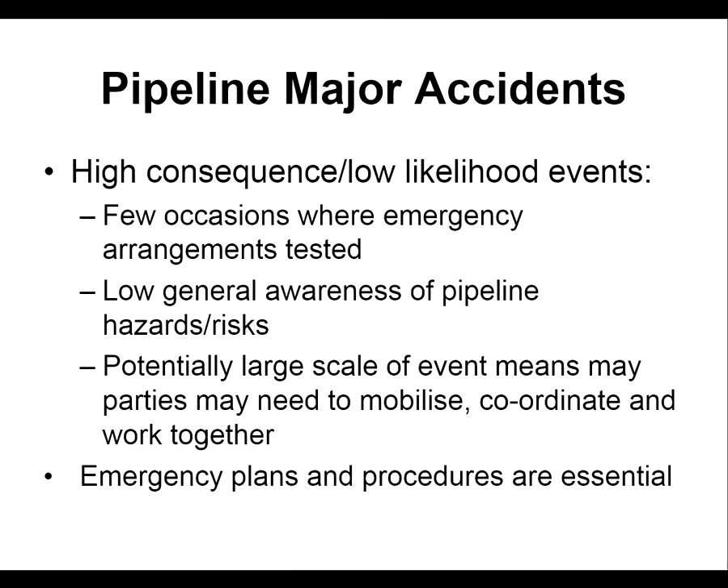The whole purpose of plans and procedures is that they're there, people understand them, they're trained to use them, and once they're activated, you don't need to worry about managing people in detail. People should just go out and do things they're trained to do without a lot of detailed management. So that's why they're important.

The typical issues associated with emergency operations: first, there's a delay in establishing the cause of an incident. This will often be because incidents are reported back through the emergency services or the pipeline operator's emergency number, probably by people who aren't used to reporting emergency incidents. They won't use standard terminology, and whoever's on the receiving end will have to make a judgment as to what's going on.

Local emergency services are often unaware of the pipeline or the consequences of failure. Well, that's a bit unfair to say that applies across the board, because if you're in a location with a lot of major hazard infrastructure, the local emergency services are normally very informed about what to do and what's there. If you're in a more remote rural area where perhaps the main activities are agriculture, the emergency services may not be so informed. So it depends. In the UK, areas like Teesside, Grangemouth, Stanlow in the northwest, and parts of the southeast where there's a lot of oil operator activity, the emergency services will be very informed and able to deal with things quickly. In other areas, that might not be the case.

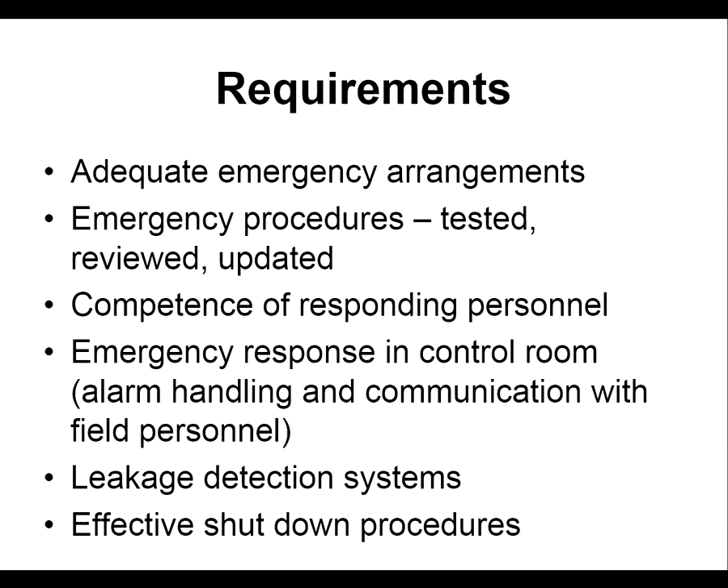And then obviously you need effective shutdown procedures. Now, emergency incidents: what you find is that in all of the major hazard industries, they will define levels of emergency. These definitions are important because they trigger certain actions, and those actions have got to be included in the emergency procedure - people shouldn't need to be told what to do. If somebody triggers emergency level 1, whoever's on standby to deal with it should know exactly what to do, and shouldn't have to be calling people asking what to do next. So the emergency incident definitions are very important because they trigger a series of reactions which need to be carried out quickly, effectively and accurately.

So let's look at what we're talking about here - Level 1, again, definitions of emergency incidents. The standard approach is that the lower the number, or the lower the letter - you might have procedure levels A, B, C, or you might have 1, 2, 3.

The higher the number, or the higher the letter through the alphabet, the more serious the incident is that you're dealing with. And the reason for that is once you've defined a level, and then you become aware that something else might happen and you have to introduce another definition, what you don't want to be doing is keep reorganizing your list of definitions, or everybody will get confused.

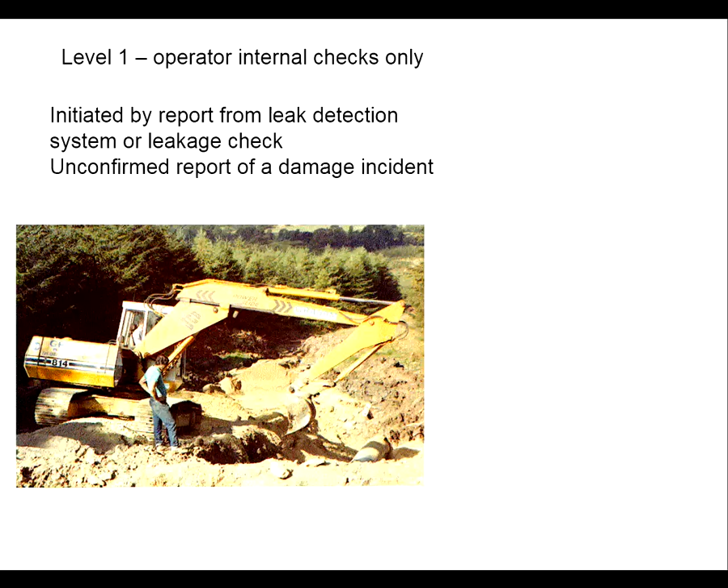So from a pipeline operator's point of view, level 1 is the lowest level of emergency, and what that really means is you've had some report either from the leakage detection system, or you've had an unconfirmed report of some sort of damage incident. Unconfirmed means that the operator hasn't confirmed that something's happened. So somebody thinks they've hit a pipeline and they've put in an emergency response. So that would be an example of the first one.

Level 2 would normally involve the operator and the emergency services, and a typical example could be a fire which has occurred on a site, on a secure site. So if it's on a secure site, it's not affecting the public. If it's a fire, somebody could well have reported it, so it is likely to involve the emergency services.

Level 3 would be a confirmed incident involving the emergency services and the operator, but no risk to the general public. Now, some of these incidents can actually be quite serious. Level 3 would normally mean that the emergency services have been notified first. Okay.

And these are the photographs. They're very poor photographs because this is an emergency that happened in this area over 20 years ago, and these are just screenshots from the media coverage. So that's why the photographs aren't very good. But I'm sure most of you will be aware of the Western Bypass that goes around the west side of Newcastle. Now, the site's actually been decommissioned, but close to the site there used to be a large array of underground high-pressure storage pipes.

And what happened was, as the road passing the storage site, you can see on the top one, there was an accident, essentially right at the edge of the site, where a lorry came off the bypass and went down the embankment. And of course Sod's Law was always operating, so the lorry actually landed on the rail track which skirted the storage site. So it looked like a very serious incident, and because it happened close to the underground pipe storage, the operator was called in by the emergency services.

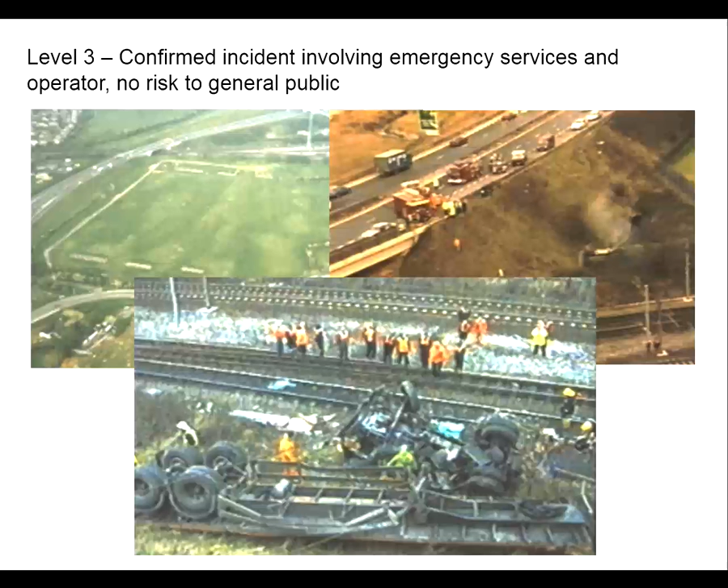Level 4 is where you've got a confirmed incident where there is likely to be risk to the general public. So you've got full mobilisation of the emergency services and the operator, and the emergency plan is initiated. Now, there have been others, but one particular incident that I was aware of as it unfolded was associated with one of the incidents we looked at in the safety lecture.

This is the failure of a large gas pipeline close to the M74, which runs up into Scotland on the west side. The pipeline is very close to the road, and this really is just showing you, if you have an accident very close to a road, you've got a hazard range associated with that. And because the pipeline's close to the road, that scenario had been notified to the local authorities.

So the actual emergency was called in by a member of the public. It happened quite late at night, and it was actually called in by a lorry driver who was passing on the road. That was called in to the police, and the police then activated the emergency plan, and it was quite serious at the time. They closed the road, they closed the railway line, and they closed Glasgow Airport.

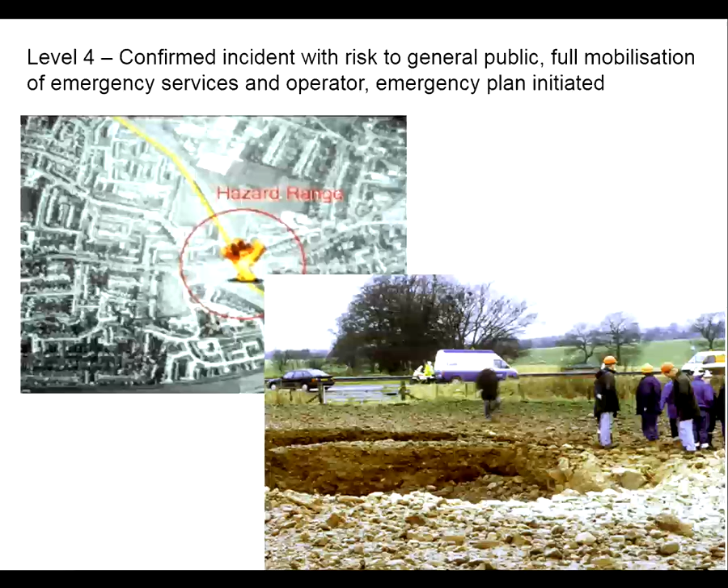Right, so if you think about the knock-on effects of doing all of that, the costs that came back to the operator: it was your asset, you caused the hazard, this is what it cost to deal with it. Those costs were quite high, so these things need to be dealt with as quickly and as efficiently as you can.

Now, this particular incident we covered in the safety lecture. I'm not going to go through it in detail again. This is the Ghislenghien incident, which was a major accident which occurred on, it was actually a construction site, but there were operating pipelines going through the site. There was a huge fire.

And I mentioned to you at the time there was a large number of fatalities. This is just an indication of the emergency vehicles trying to get onto site. So it was a major notification, so just about every emergency vehicle in the area was trying to attend. That generated quite a lot of chaos at the site, and there you can see the queue of ambulances waiting to get on the site to pick up fatalities and injuries.

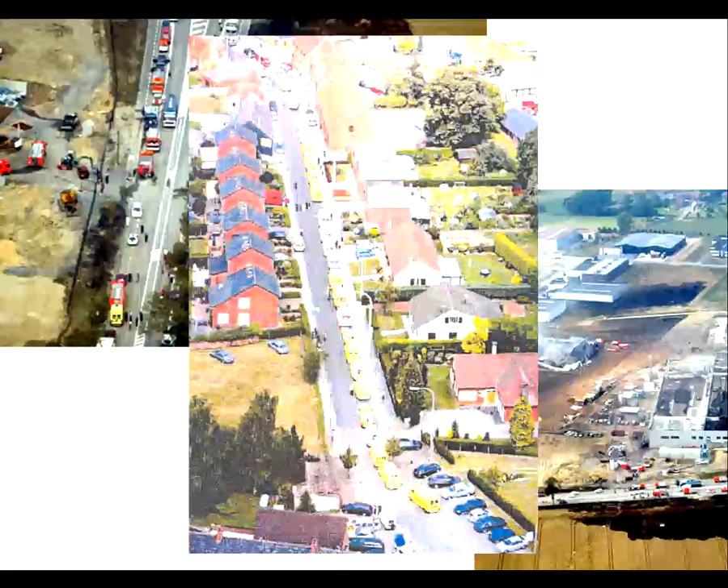So organising response to issues like this is non-trivial, and of course the issue is, once you're in the middle of it, you want to organise it and you want to do it properly, but when it's just a theoretical event, you think, well, do you really need to do all of that? So

let's think about how you start dealing and planning with it. Well, the first thing you've got to do is look at what sort of scenarios you might be dealing with, and in particular what types of emergency you may have to deal with and therefore have procedures for.

The emergency plan is obviously a legal requirement, and in the UK it's the responsibility of the local authorities. Generally, in other parts of the world, it would be the responsibility of the local government organisation, whoever's got that responsibility. And basically, it's got two arms to it. One is the emergency response, which is always provided by the emergency responders. So that is always provided by the local government organisation.

And then it's got the operator, and you can see that the operator procedures are going to be essential to what happens, the main one being shutdown, isolation, and then following that, repair and recommission. These two groups of people or two organisations don't work together very closely, and suddenly you've got a situation where they're forced to work together closely.

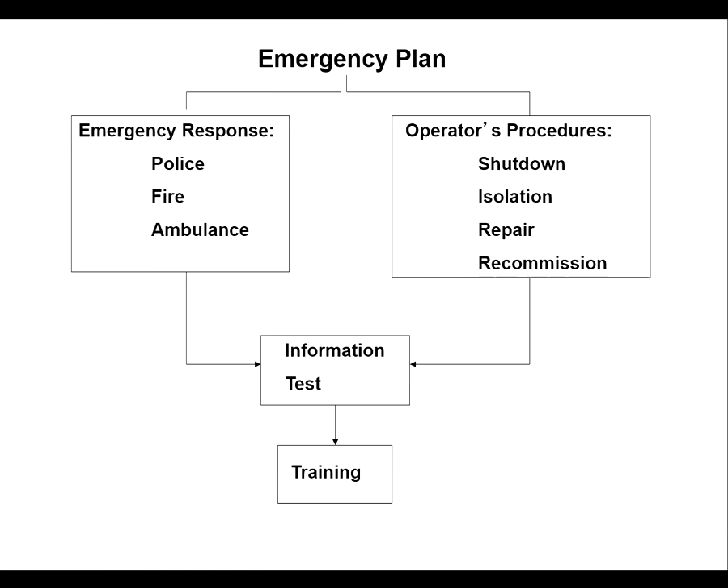So you've got to plan for that, and the way it's planned is you exchange information and you have to run tests. If you're going to run tests, people need to know what to do, so you've got to have training. And what you actually find in this sort of situation is the link between information and testing and training is quite close, because testing gives an opportunity to train. Okay?

Right, the emergency plan. It's got to be clear and easy to understand. It's got to be flexible, because you don't know where you're going to have to activate the plan. It's got to consider the safety of the public, the responders, and it's also got to look at environment and economic aspects. It's got to very quickly allocate roles and responsibilities, and in particular the allocation of roles and responsibilities is probably most important between the emergency responders.

So for example, in the event of a major accident, you would normally expect the fire service to take immediate control, and the other emergency responders have to basically report to the fire service. However, once the incident is under control, the police take responsibility, because it's their responsibility to get everything back to normal, because while you've got an accident going on, everything's disrupted and there's all sorts of knock-on effects.

So you've got an obvious tension, you can see, in that the fire service are wanting to make sure everything's controlled and safe, whereas the police are saying we want to reopen all the roads, we want to make everything accessible again.

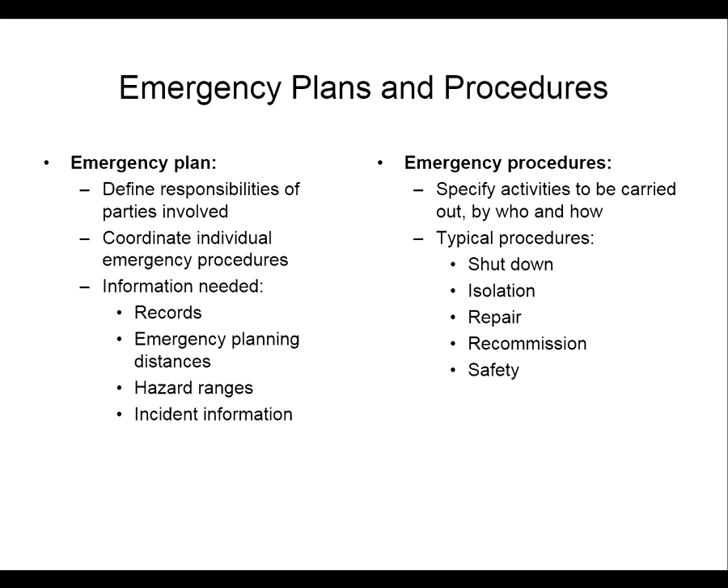The other thing that emergency plans need to do is identify and use existing procedures, right? So the emergency responders will all have their own internal procedures about what they do in the event of an emergency, and what you can't do is change those procedures. Does that seem obvious to everyone? Because it's very important. If you're expecting people to respond quickly and essentially automatically, you can't then suddenly change what they're expected to do. So the last thing you can do is have an emergency plan which could cut across the emergency responders' procedures, or not take account of the pipeline operator's procedures, because all you'll end up with in that situation is chaos.

So the emergency plan will eventually focus on the emergency response and basically say, well, in the event of an emergency, this is what everybody's got to do. So if you just have a quick scan of that list, you can see where the interface with the operator is going to be very important here. The operator needs to inform of the failure modes and consequences. It's the operator's duty to determine the hazard distances that might be associated with a release.

In reality, it's the operator's duty to do this, but you often find that's the first source of conflict between the operator and the emergency responders. The emergency responders like to take responsibility for this because essentially they are the ones who will take decisions about evacuation and shelter of people. But the operator is probably in the best position to be able to do that. Then there are potential problem areas, obviously geographical areas where you could have a problem, in particular a problem of access.

The identifying the nature and extent of resources that may be needed in the event of an accident. Actually, just on this one, geographic areas: you might think a geographic area is going to be a problem if you can't actually get emergency equipment to the area.

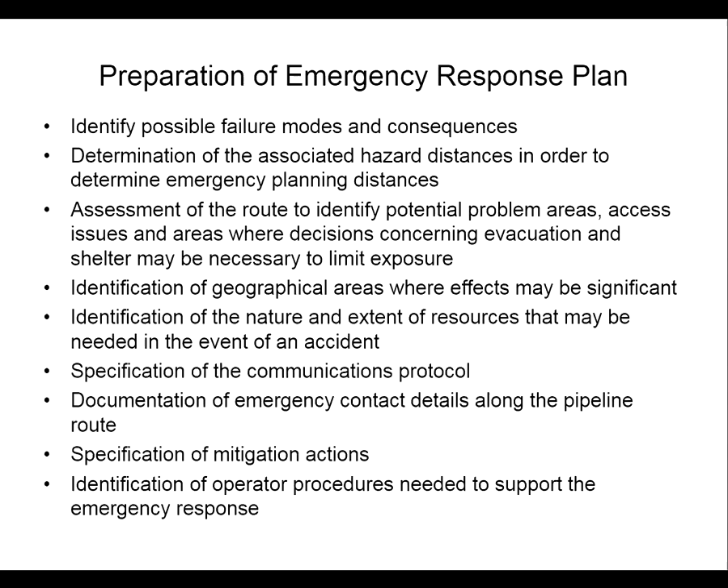Okay, so the information you need to prepare the plan is actually quite straightforward, and we've covered a lot of this. Well, we haven't covered details of planning distances, but we've talked about hazard ranges, and we've talked about the types of hazard associated with different types of product.

Right, now the communication system has got to be simple and brief. The problem with communications systems being brief is that people develop lots of acronyms so that they can say things quickly over mobile phones or radio systems, and what that means is there's very few people who actually understand what they're saying, so that is a problem. Recording of information is very important.

Modern emergency communication systems rely heavily on mobile telephones, and at one time, I'm not sure what the position is now, that meant that in the event of an emergency, the local mobile phone network would be immediately taken over so that it was available for use in the emergency. And of course that happened in the Buncefield incident, which happened in the UK, I think in 2005. The local mobile phone network was taken over so that there was clear communications between all of the parties. And what that meant was that a lot of the local people couldn't use their mobile phones because they were inactive. So there's all sorts of issues. But the main communication requirements are receipt of emergency calls, notifications, and responsibility for liaison.

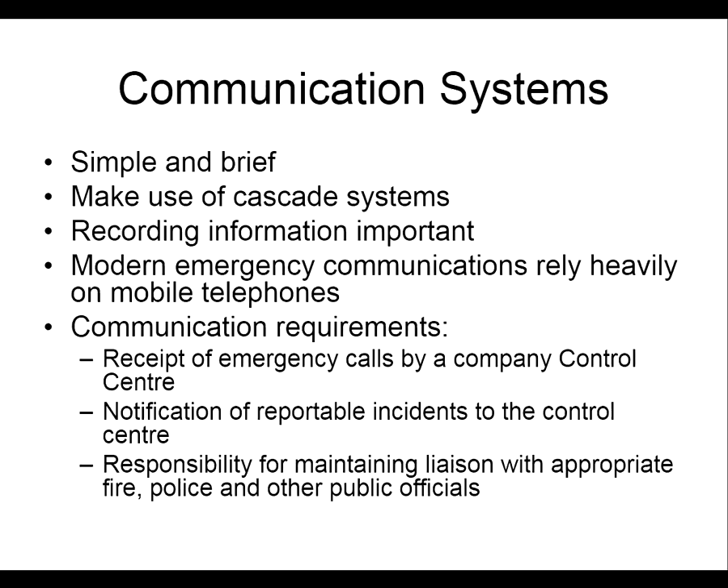Right, in terms of the emergency plan, you've got to look at worst case scenarios, and this doesn't necessarily mean thinking about the absolute worst disaster that could happen. But if a bad situation occurs and you're not prepared to deal with it, then that is a serious flaw. So, for example, if you look at worst case scenarios for pipelines conveying flammable fluids, the worst case that you would probably have to deal with would be an unconfined vapor cloud, which would lead to an explosion followed by a major fire.

So if you think that's the worst case, you've then got to look at the extent and size of the cloud, the dispersion concentrations, the overpressure which could occur in the event of the explosion, since the explosion would happen in the event of ignition, and then the safe distances for people.

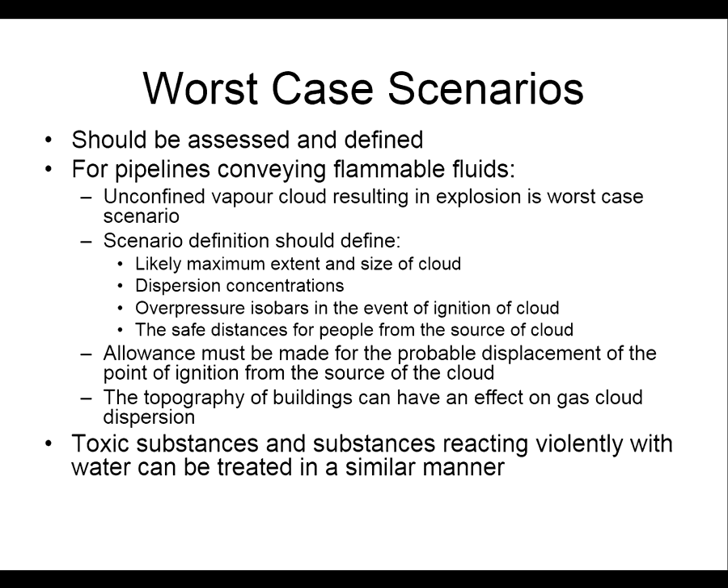And of course the big issue you're dealing with in this worst case scenario is that the source of ignition is unlikely to be at the point of incident. So dealing with that is a problem, and that brings you into topography of buildings and the effect that has on gas dispersion. Toxic substances, of course, probably provide the absolute worst case scenario.

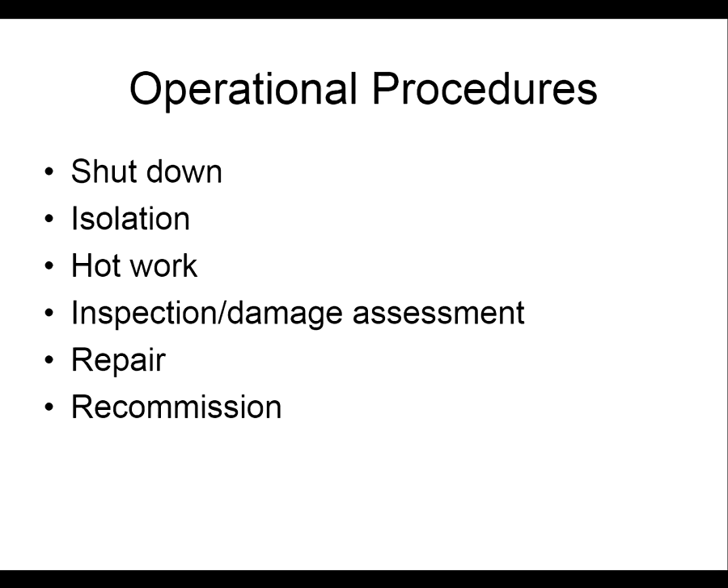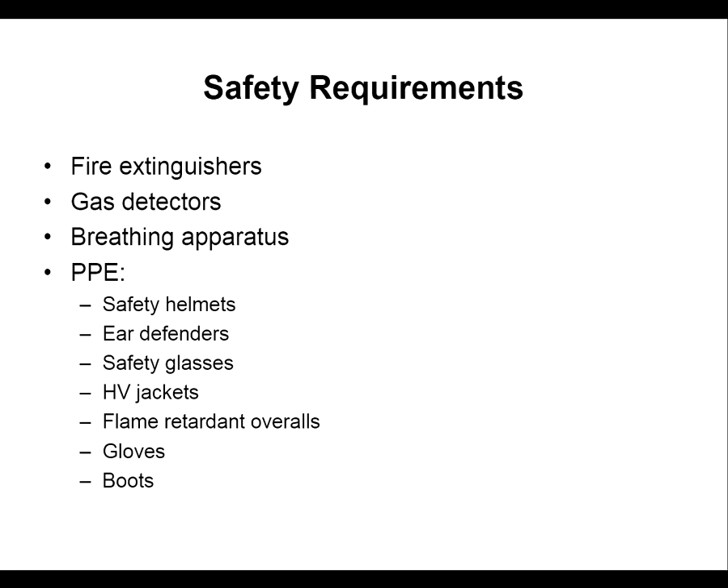Safety requirements predominantly deal with the hazard and protecting the people who are dealing with it. One important aspect of emergency procedures is the management of damaged pipelines. If you've had a report that a pipeline is damaged but isn't leaking, the issue is: it might not have failed now, but could it fail in the immediate future, particularly when people are working on it? So what's absolutely essential as part of this is procedures for management of damaged pipelines.

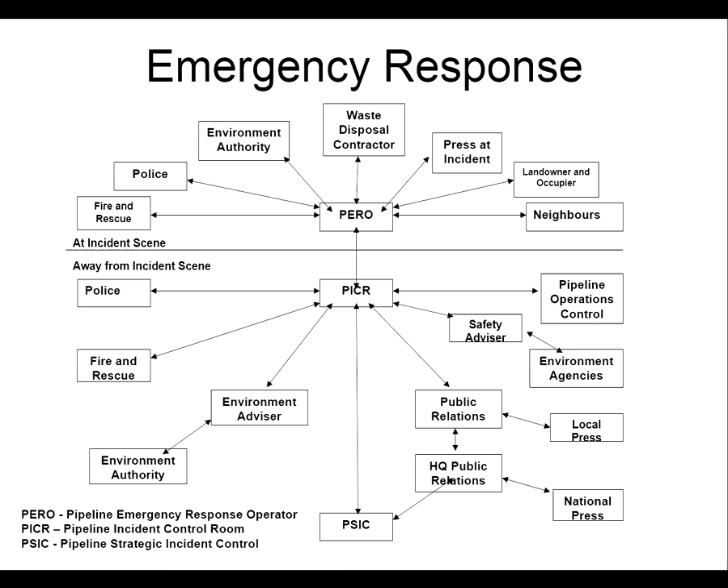Procedure for operators. Yeah, absolutely right - that's why this isn't a good slide, because it's basically saying, well, in the event of an emergency call coming into the operator's control room, what does the controller do? You're absolutely right, and therefore in that respect it's only a very limited aspect, and in reality the situation looks more like this - much more complex, much more confusing, and much more difficult to control.

So that takes us back to testing, reviewing and updating. There's a number of things you've got to take into account here: first of all, the fact that the local infrastructure is going to be changing, changes in response technology, and lessons learned from previous incidents. That's actually quite difficult to do - people don't do that terribly well.

Lessons learned from the application of plans during accidents - well, if we think about it, we talked a lot about the Buncefield incident and the Ghislenghien incident. There are still papers being produced about what was learned from those incidents, so it does take a long time.

A big problem is changes in personnel, particularly now, because you find that people don't often stay in one position for too long. So training is important, because these events don't happen very often, and when they do happen, you expect people to deal with them.

So you've got to train them, and that means you've got to basically expose them to real events. For example, in the UK, the organisation that does a lot of that is the Fire Services College, where they actually run what amount to real life incidents. People have got to be aware of incident terminology - in particular, the obvious incident terminology they've got to be aware of is the definition of the level of incident.

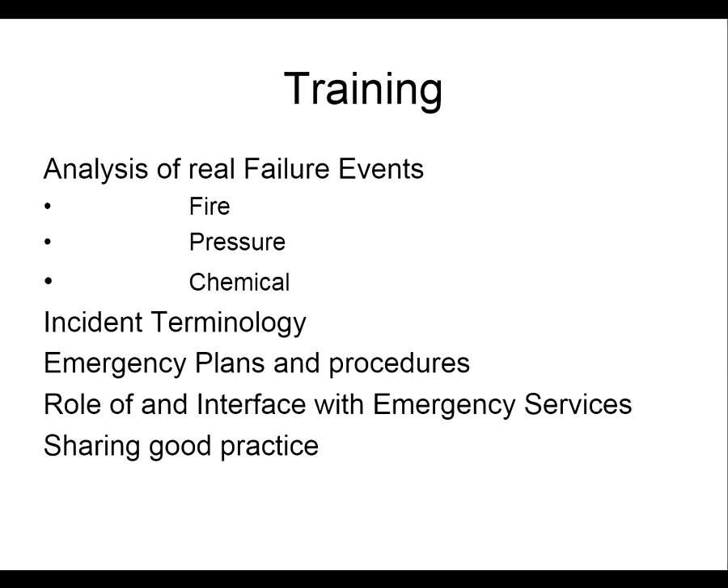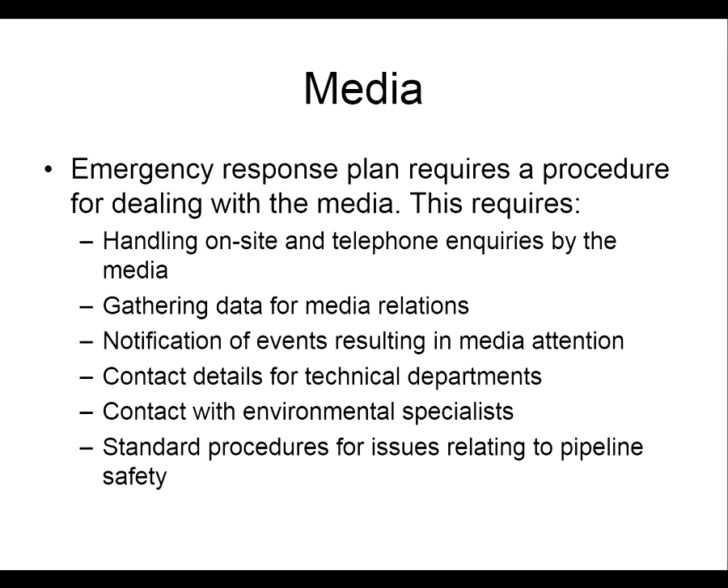Obviously the bottom line is sharing of good practice. Now, media - any emergency response plan is going to require a procedure for dealing with the media, and there are a number of issues you need to address. If you don't control the interface with them, they will take control of how they're informing people. But you've got to deal with them because the media will be the fastest route of informing the public. If you use the media properly, you can deal with the initial aspects of the emergency very quickly and effectively, which means you've got to manage them so they don't issue things that could frighten people, because when people are frightened they won't behave in a controlled way. But you can get information to a large area and a large number of people very quickly.

These are the number of considerations you need to take into account when developing emergency plans and procedures. This is a typical tutorial question, which shows how I expect you to deal with this information in terms of an exam. You should be able to explain why emergency level definitions are needed - the examples are fairly straightforward - and explain the purpose and objectives of the emergency plan and emergency procedures: what information is needed, what activities are involved, interface with the media, the purpose of regular training, and why a procedure for management of damaged pipelines is required and what it covers. The most important bullets there are the first two.

We'll be coming on to that again when we go through the overview and summary. Question: do codes and standards give guidelines on emergency operations?

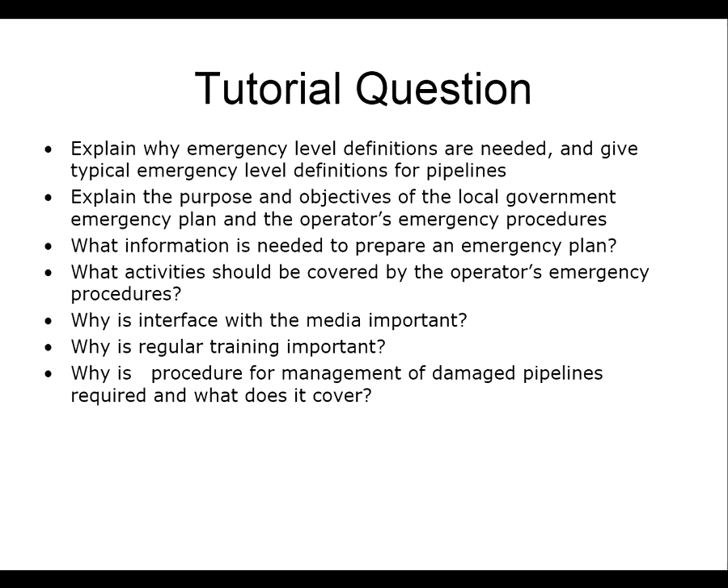Right, I just need to decide what to do now. At the beginning of the lecture, what I said was, in terms of this session...

There's 3 things I want to do. The first one was to go through that lecture. Second is to go through an overview of the lectures I've given you, and then I have a summary lecture which goes through the overview and points out the important bits in the notes I've given you. I'll only do that if you want it, it's not necessary. And then the final thing is to return to the assignment.

Now the session on the assignment is down to you really. I would like to be able to offer you any help that I can. If you've started on the assignment and feel you want to just get on with it the way you're dealing with it, then please don't feel you need to stay for that session. I'm going to go through some high-level points which, if you haven't started the assignment, are a quick kickstart to it.

And because the assignment is based on a real project that happened, I have brought some material prepared by the operator that was presented to the technical community and the safety regulator at the start of the project. A lot of it's not relevant to what you're doing, but some of it shows you the kind of issues the operator identified that they needed to think about. Okay.

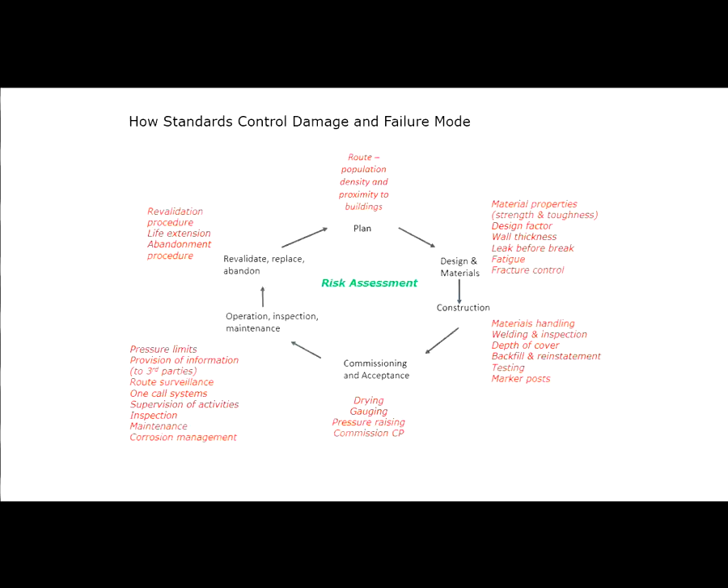Then I gave you a couple of slides which basically said all of the pipeline standards aim to minimize failure and mitigate consequences. So those are the aims—so how do they do that?

In terms of minimizing the frequency, they try to avoid material and construction defects, and they do that by requiring technical specifications, and in particular the pressure test—the pre-commissioning pressure test.

They control degradation, in particular through the design and installation of corrosion protection systems. They ensure pipe resistance to the majority of likely impact damage through wall thickness and any required protection measures. And they control the operating stress of the pipeline by controlling the design factor.

Okay? Sorry, how many questions are you going to ask in the exam? Well, I contribute half of a safety question, and then I do two full questions on the exam, which is set at the end of this module.

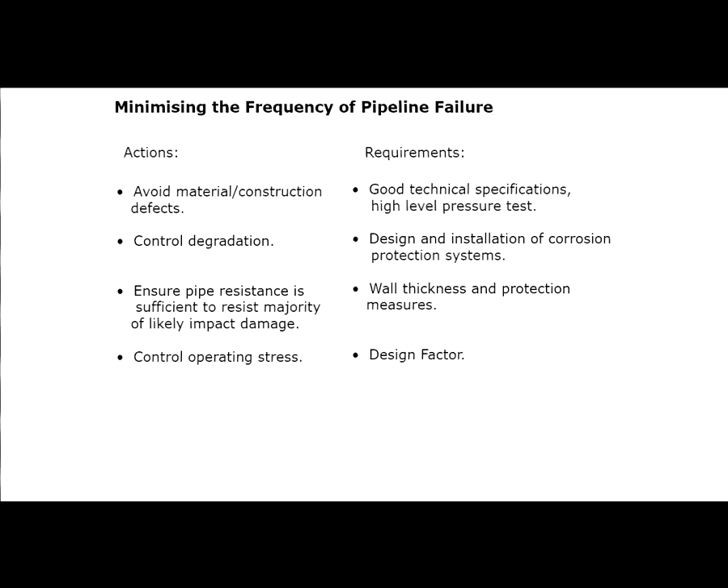Right, minimizing the consequences of failure. The codes do that by the selection of the location of the pipeline, and generally that's how the code classifies the location and how it deals with the population and infrastructure around. So in the UK codes, they will classify the location as class 1, class 2, or rural and suburban, and then the ASME code basically starts from class 1 through to class 4.

Routing: having identified and classified the area, the codes then basically provide guidance in routing through areas of minimum population and infrastructure, and in doing that they specify the distance from the population and infrastructure, and the intention there is to minimise the development, and therefore numbers of people in the vicinity of the pipeline.

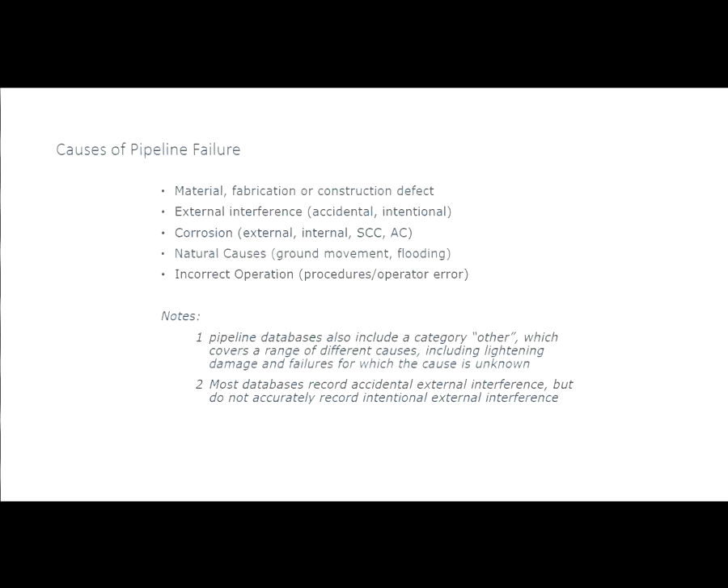Causes of pipeline failure, fairly standard causes. These are the typical causes which are listed in all of the failure databases. The key ones are material fabrication, construction defects, external interference, corrosion, natural causes, or incorrect operation. And then there is always a category other, which is a catch-all for everything else that might happen.

And then we discussed some pipeline failure modes. The leak is a stable defect. The rupture is an unstable defect which will extend during the failure, and the extent depends on whether you've got a liquid or a gas. It's dependent on the compressibility of the fluid which is in the pipeline.

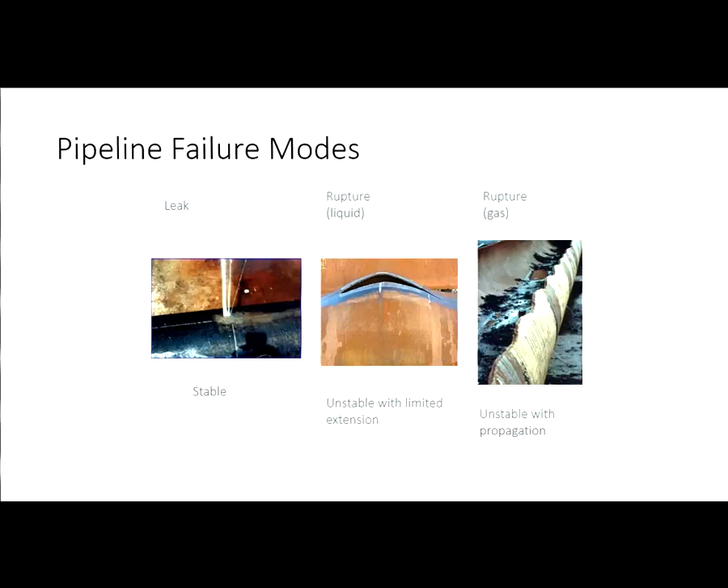Right, so coming on now to surveillance, inspection and maintenance. These were the points that I said I would like you to pay attention to. So the main purposes of surveillance are to assess population changes in the vicinity of the pipeline and to identify activities which could pose a threat to the pipeline, in particular anything to do with land management or construction, and also to identify any environmental issues which could apply loading to the pipeline, such as floods and ground movement.

Inspection. The main issue with inspection of pipelines is internal inspection and external inspection. So actual physical inspection of the pipe wall, which is inline inspection, and external inspection or condition monitoring, which is monitoring of the CP system and CIPS and DCVG surveys. Okay.

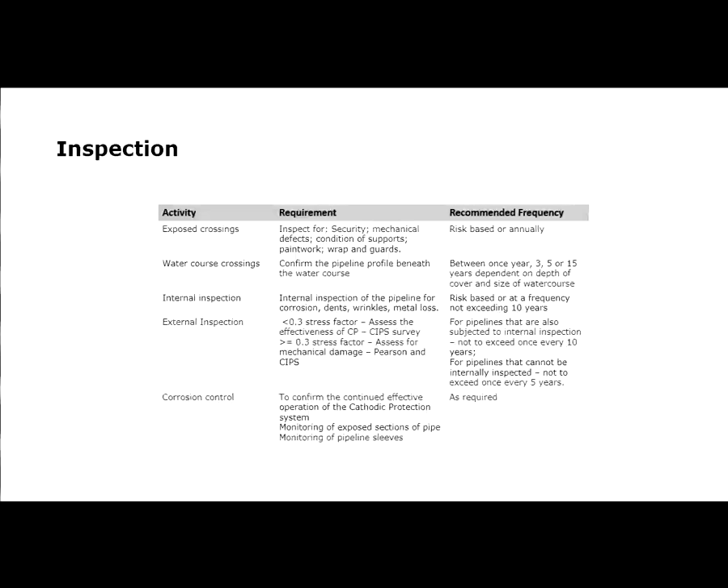Right, pipeline installation, operations and maintenance activities. Now, this aspect is essential, but it's tedious, and I have tried to simplify it and put the information in tabular form. The main issue here is on any site, you're going to have to do routine checks, functional checks, and overhauls or aspects of mechanical maintenance. So I've tried to summarise that, indicate which equipment is relevant and the frequency that you would do that. We covered the frequencies in that.

So I'm not looking for very complex and analytical assessments of reliability-based or risk-based maintenance. The bottom line is, as a pipeline operator, you're responsible for a number of installations, so what is the minimum you need to have in place to deal with them?

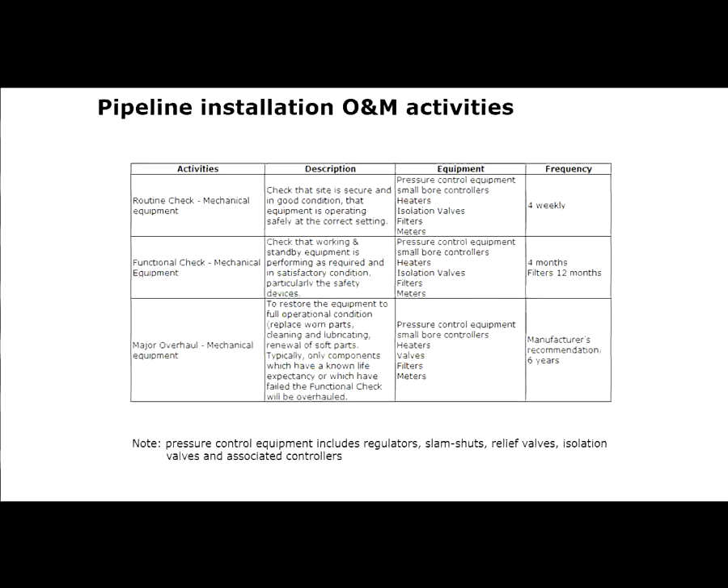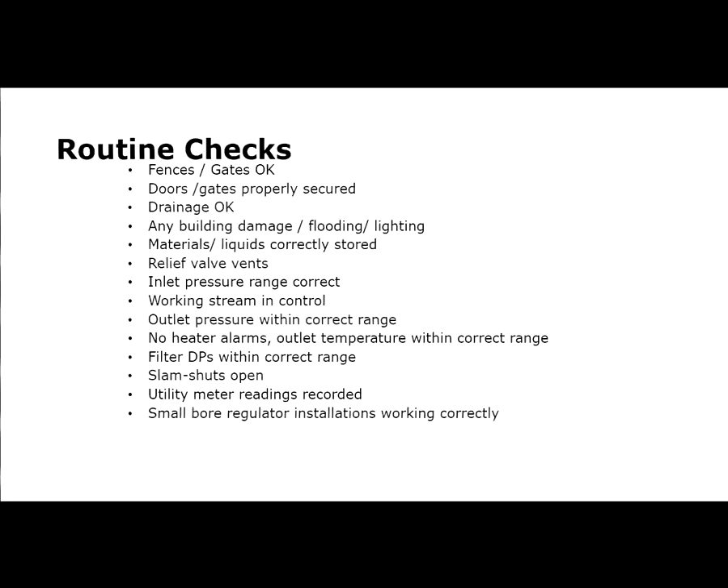Right, I'm certainly not suggesting for one minute that you need to learn these lists, but what you do need to know is, basically, what's the difference between a routine check and a functional check? So we covered the example lists of what sort of things you would do. You don't need to learn these lists, you just need to have a feel for what sort of activities you would undertake in routine checks. Similarly in functional checks, so bottom line here is, what's the difference between a routine check and a functional check?

Okay. Factors affecting maintenance frequencies. The issues here really are the site characteristics. If you have a remote site, a remote unmanned site, the tendency will be to visit the site on a minimum possible basis. And in order to do that, you need to take account of, well, what sort of telemetry have you got in place? In other words, can you monitor it remotely?

Is it critical to the performance of the system? Is it sensitive to any environmental factors? Like, for example, if you suddenly have a very low temperature, could something affect the site, and therefore, following a low temperature weather incident, should you go and check it? And bottom line, is it secure? Routine checks are generally associated with the security of the site.

Okay, so if it's in a very remote area and it's pretty secure, then you'd think, well, do you need to visit it every month, or could you extend the frequency to 2 or 3 months? And then in terms of telemetry, it's a question of how much telemetry you've got in place. There should always be a minimum level of telemetry, because you will have to operate a SCADA system on the pipeline. But for some sites you may have much more.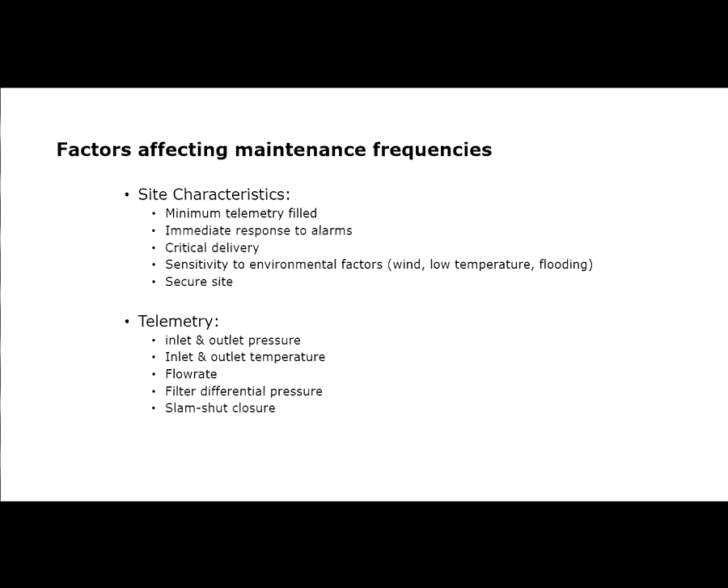Right, hot tap and stopple procedure. Obviously, Gary covered all of this last week, and all I'm going to do is take you through some slides which are on the notes which I put on Blackboard. Right, so hot tapping is drilling into an operating pipeline to get access to it, and stoppling is plugging the pipeline temporarily so that you can do something to either modify or repair it.

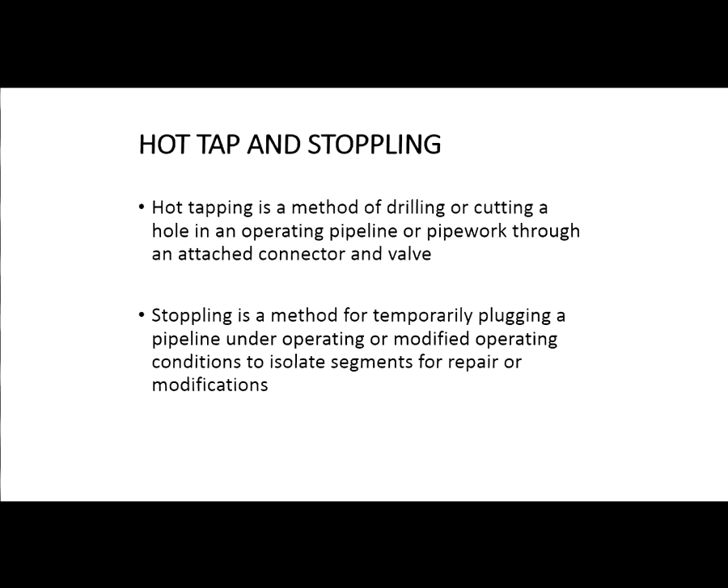So the procedure, very simply, is this list of activities. Now I need you to have a better handle on it than just this list, but the list is important because it's very easy to miss one out. So you've got to think about the preparation. The preparation is basically digging the hole, checking the pipe, etc. Installing the tees, carrying out the drilling operations, fitting the bypass, inserting the stopples, undertaking the work, recommissioning the isolated section, withdrawing the stopples, removing the bypass, and then locking off the stopple entry points.

Now, in the notes that are on Blackboard, I've been through each of those and put a fairly reasonable description of each of them. Okay, so hopefully that means that the key factors in each of the stages of the procedure are there, so that you can see why they're important.

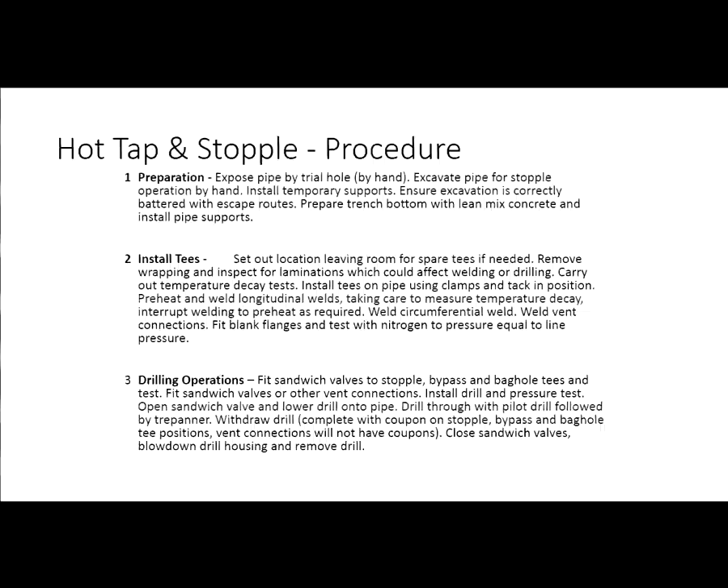Lots of engineers would prefer to use diagrams rather than lots of words, and so annotated diagrams are totally acceptable. So as long as you get all of the stages of the procedure, so you don't miss any of the key stages out, it's quite acceptable to do it as a series of diagrams.

The next ones you're going to use to insert the stopple, and in the notes that are on Blackboard, the next tee was generally used as a baghole tee. Now, the issue here is the double block and bleed requirement. Okay, so this procedure was developed primarily by the gas industry.

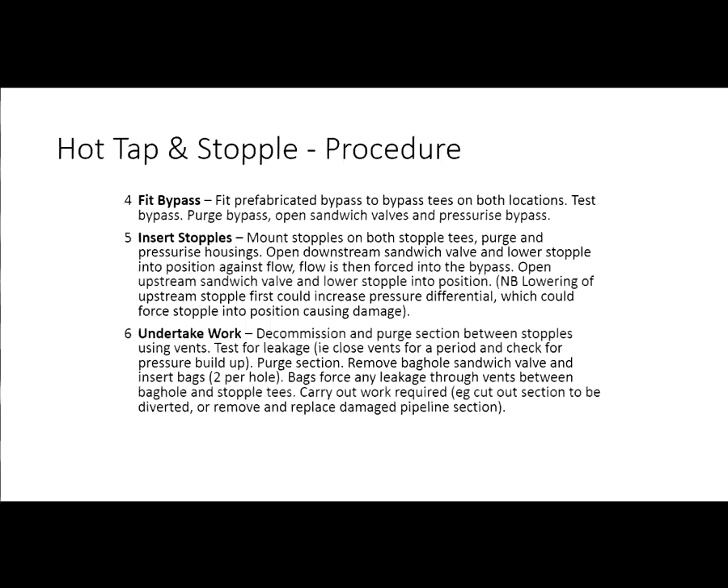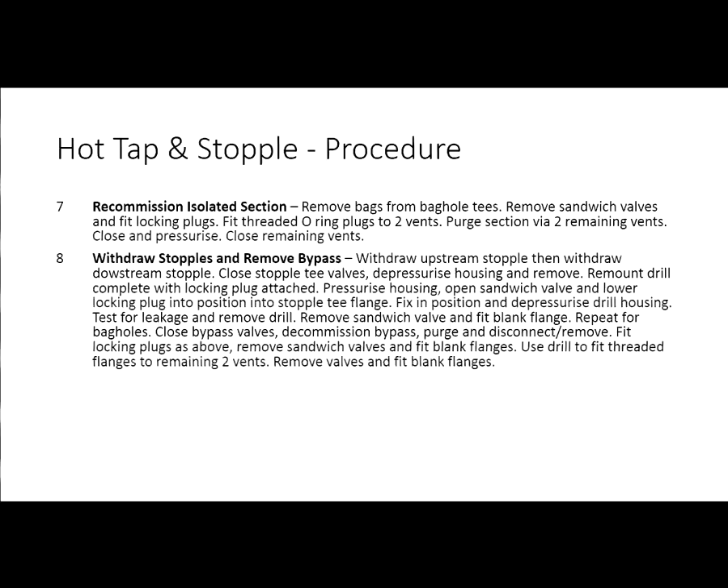And then finally, recommissioning the isolated section, which means essentially removing everything and purging and fitting the locking plugs, then withdrawing the stopples and removing the bypass. And as Gary emphasised last week, the important issue here is to remove as much as you can from the pipeline, because whatever you leave on the pipeline is then going to be part of the pipeline for its future operation and could affect the integrity of the pipeline. So the approach is always to try and remove everything that you can. And then this is a diagram which basically explains the locking flanges.

Sorry, regarding the integrity, you mean removing inside the product? No, if you think about it, before you start the operation, you've got a length of pipeline, which is just the pipeline, okay? Then you do this operation, and as a minimum, you're going to leave the tees on the pipeline, because you welded the tees onto the pipeline so that they provide you with a full pressure containment location, so you can't take them off. But whatever you can take off, you take off. So for example, you've got a tee with a bypass connected to it. You don't leave the bypass there, you take the bypass off. Okay, so whatever you can remove, you do remove.

And this is basically just showing the procedure for locking. So we've got these specific locking flanges, which Gary covered in his presentation. They've got an O-ring in them for a seal. So these locking flanges are inserted essentially using what was the stoppling arm. So they're pushed down into the T.

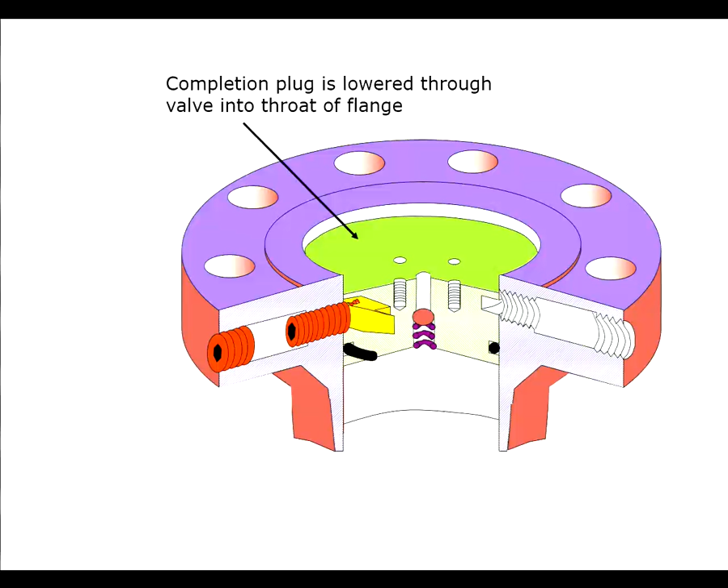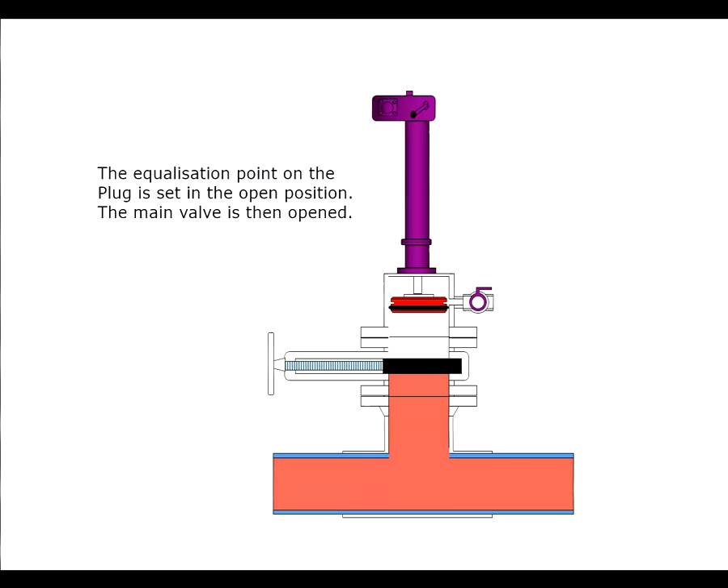Okay, and obviously there's this. What you're actually doing, you're putting this in as pressure containment, so you've got to be able to equalise the pressure over the plug while you're doing it. If you don't do that, there is a chance that the plug might not seat properly, so you could end up not having it inserted properly. Okay, so once you've got the plug in place, you then open the valve and you push the plug down into the T.

Okay, so here, this is the sandwich valve, and you can see the sandwich valve has got these flanges on it. This flange is connected to the T. So actually, it's not screwed there. It's like seal it and fix it. That exactly, yes. But it has got a groove in it, right? And you are going to have to screw connection points into this groove to hold it in place.

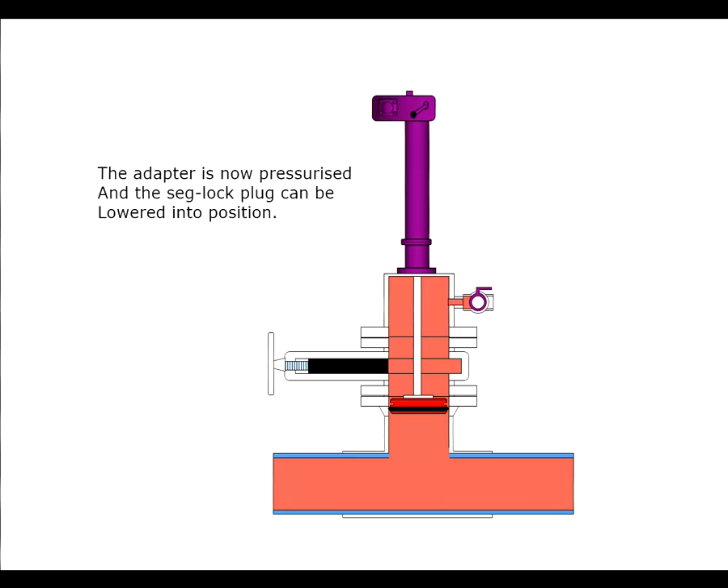So essentially this flange here, when you take the sandwich valve off, that flange needs to be replaced by a blank flange over the plug. So essentially the plug is being used for pressure containment while you disconnect all of the equipment. Okay, so once it's in position, you then drive the screws into the groove. So basically when you take all of this equipment off, you're not just relying on the O-ring to make the seal.

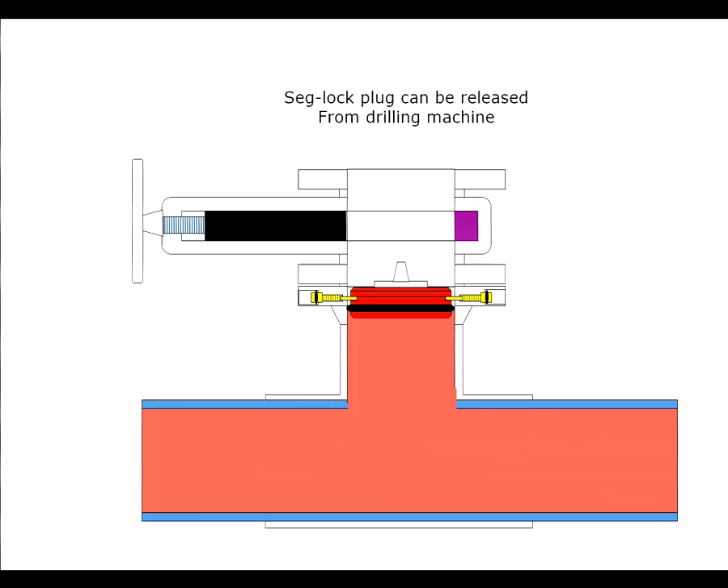Which means you can then bleed down and you can expect the plug to actually hold the pressure differential. You can then take the valve off, take the plug holder off and put the blind flange on. Are those screws part of the T? Yes, those screws are part of the T which you are plugging off.

So these hot tap T's are actually quite specialist components. And in fact, I think there's a complete ASME standard which is dedicated purely to the design of hot tap T's. Yeah, they have the dedicated hole with a seal. These two holes, they are for the screw? Yes, these here. This one. Yes. They're basically indicating that you're screwing in.

Okay, so basically, this is what I meant earlier. You've got to get to the stage where you've only left on the pipeline things that you can't really take off, and whatever you've left on the pipeline is secure. And one of the issues is that a lot of these connections do leak, and if, as a result of not installing them properly, they leak, then you've got an ongoing maintenance issue to deal with.

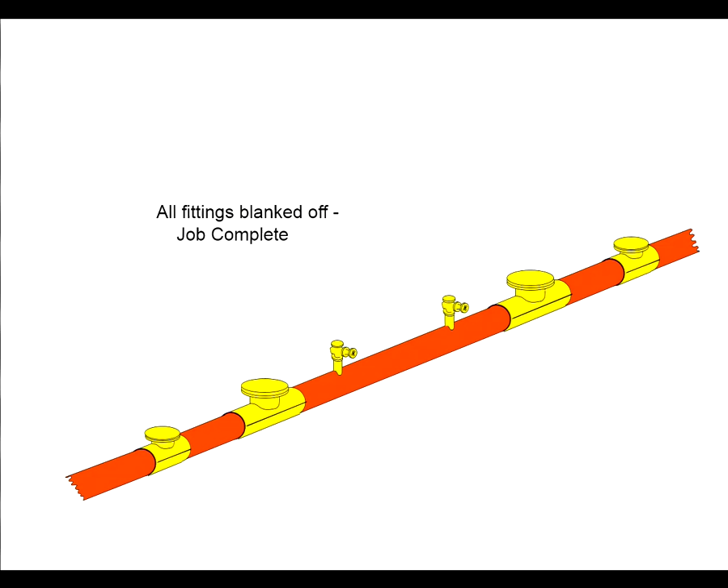So that would be the ideal scenario, right? Sorry? That would be the ideal scenario. Absolutely, yeah. Right, okay, so I'll just quickly go back to the final bit of the...

Okay, so basically the aspects of emergency operations which I would like you to concentrate on are the emergency levels and why they're needed, the purpose of the emergency plan and the purpose of the emergency procedure.

The emergency incidents are there. Why are they needed? I don't think there's a specific point on why they're needed in the slides, but I think we discussed in quite a lot of detail why you need these things. In the event of an emergency, you haven't got time to do briefings, provide instructions. You've basically just got to expect people to follow procedures and to know what they have to do. And therefore, your emergency procedure has got to immediately tell people what sort of incident they're dealing with.

Purpose of the emergency plan. Regarding this question, why you need the emergency plan, can I just write your answer? Let's say, in case of emergency, you don't have time to do briefing, that kind of thing. Absolutely, yeah, and I will get full marks. Oh, you'll get full marks of however many marks are allocated, absolutely.

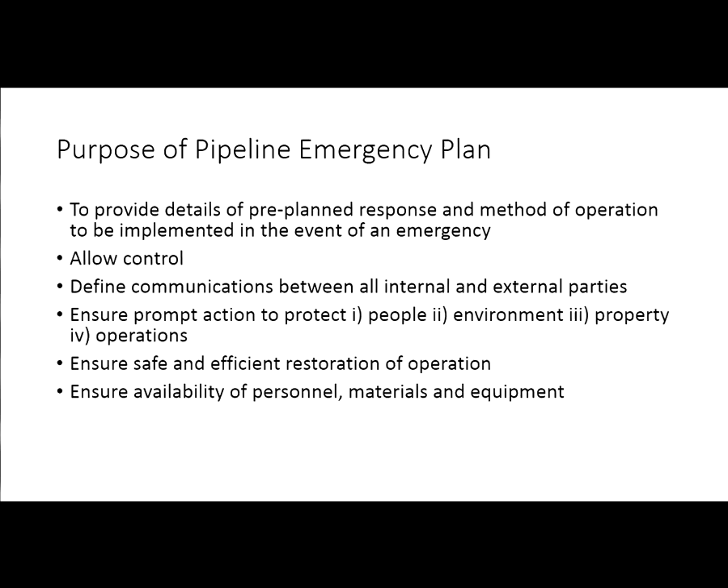Right, so similarly we've got a list of bullets which are to do with the purpose of the emergency plan. So that's basically a summary of what I've given you.

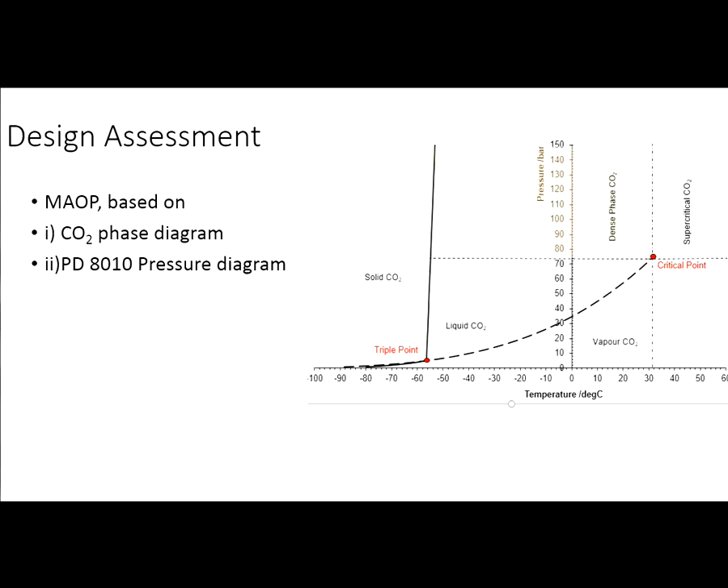You haven't got that luxury because you're using an existing pipeline. So you need to look at what are the pressure limits for the pipeline as it stands at the moment, and how do those pressure limits relate back to that phase diagram. I've got a little bit of information on that in one of the operator presentations. The PD8010 pressure diagram basically defines a number of pressure conditions, and you need to review those to identify which ones are important.

And in particular, you need to look at items 3, 4 and 5, because you are redefining the maximum allowable operating pressure, but you've got to relate that back to what 8010 is dealing with as a design pressure. Okay, and you've then got to think, well, as you would do for any pressurized system, you've got to identify a maximum incidental pressure.

I mean, when we are really using the... Yes, there is the requirement for the old, yeah? Yes, for this. I mean, you can think about that, and you can make a point in the assignment.

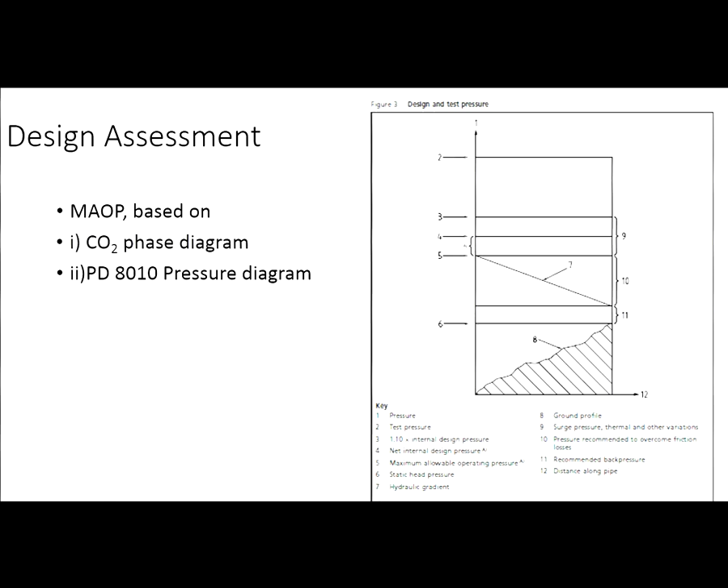Right, now calculations. You need to calculate the design factor. Calculating the design factor is in both TD1 and it's in 8010 part 1, and I'll tell you now that the way that the two codes tell you to calculate it is exactly the same. Both codes tell you that you've got to calculate the design factor using the minimum pipeline wall thickness, which means you've got to check the manufacturing tolerance.

And what I suggest you do is you decide what the pipe material is, and because this pipe was first commissioned in 1978, what would be a standard large diameter high pressure pipeline in 1978? Well, it's going to be a seam welded pipe, isn't it? So you need to look in API 5L and check what the manufacturing tolerance is for that, and then you need to apply that in the calculations, because in the information that you were given, the nominal pipeline parameters. Okay?

Right, now the BPD in TD1 we looked at briefly last week. You've got the design section for TD1, and there's a figure, I think it's figure 5, I can't remember, but figure 5 gives you the BPDs for high pressure pipelines, and it gives you the equation for how to calculate the BPD for the pipeline. So you've got to calculate the BPD in accordance with TD1.

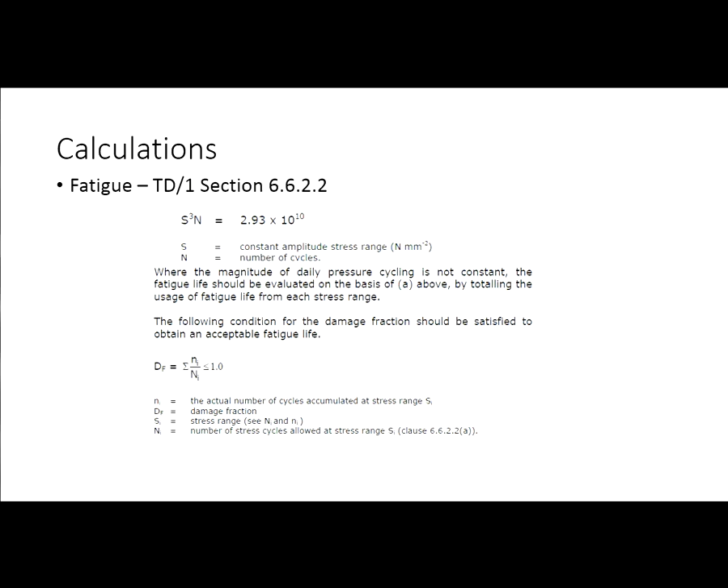What you've got to do is calculate the damage fraction and decide, has the pipeline seen any significant fatigue damage in previous life, and has it got enough scope to see fatigue damage in its future life. Okay, so you'll need to make some assumptions about the potential pressure cycles that it could see.

All you've been told is that it is going to operate for another 15 years. So you then need to make a decision about the fatigue for the next 15 years. You just need to make a straightforward engineering judgment, and you need to explain what you've done.

Okay? Right, I'm just going to quickly run through a couple of presentations. This particular presentation was right in the early days of this project. National Grid produced a number of conference presentations, and basically what they were doing was saying, right, well, we're going into a new area. This is what we're doing. We're going to tell the technical community what we're doing, and if anybody thinks we're doing it wrong, they should come back and tell us.

And we're going to interface with the regulator and tell the regulator what we're doing, so that if anybody's got a concern, they tell us now and we can deal with it, rather than we get to the stage where we've changed the use, we're operating a CO2 pipeline and everybody has problems with what we're doing. So that was the process. So this was quite an early presentation that they gave. Sorry, I forgot to take the animation out.

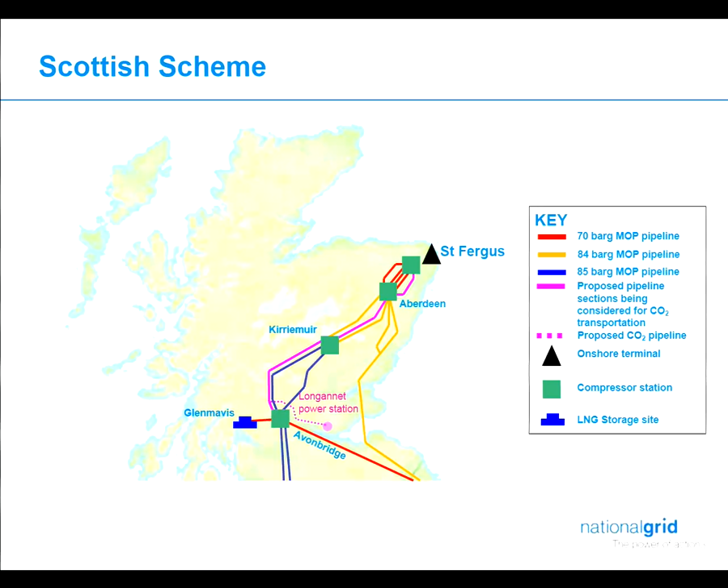So the key requirement was to get lots of gas down from St Fergus to England. So they built these large, there were actually 4 pipelines, 3 coming down this route and another big one which went down that route. And because the supply of gas in the UK has changed and they now don't need as much gas from St Fergus, one of these pipelines could be decommissioned or its use could be changed. And so they decided they were going to use one of these pipelines to collect CO2 from Longannet power station and transport it up to St Fergus, and then from St Fergus it was going to be pumped offshore for storage.

So that was that particular one, and basically it's a fairly simple scheme in which this is the new section of pipeline, because obviously the gas system isn't connected to the power station at the moment, so new section of pipeline required. Then this is the existing pipeline which goes through a number of installations, and it then needed to be connected through another new pipeline to a compressor facility which would then be used to essentially pump the CO2 offshore. Right, so here's the first key.

Obviously they did a number of assessments. What they wanted to do was get the best use out of this pipeline. However, they decided that the maximum allowable operating pressure was going to be 32.5 bar, which allows an incidental pressure of 35.5 bar. And it means the design factor is 0.3. So that was the decision they came to.

That doesn't need to be the decision you come to, but it's only reasonable to let you know what was going on. I won't spend a lot of time on this particular one. This is a much more complex scheme, which was to do with linking a number of power stations and industrial outlets into a network in which they were going to collect in the gaseous phase and take into a spine pipeline and then operate that in the dense phase and pump out to the southern North Sea.

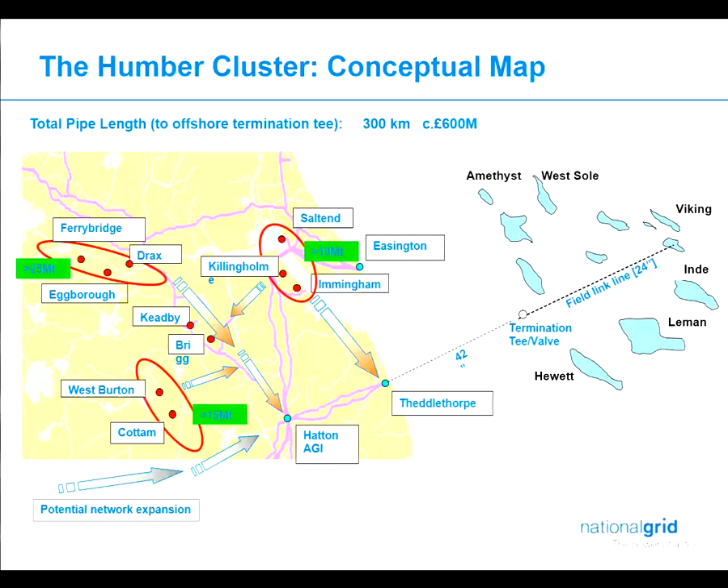Right, so let's look at what they said about existing pipelines. From their point of view, using an existing pipeline is a fast track because one of the longest phases in getting any pipeline development is getting the routing agreed and getting all the planning permission installed. So if you've got something which is already in the ground, that's a fast track. They were intending to use pipelines that are no longer critical for natural gas transmission.

Operation in the gaseous phase involves pressures lower than the original design and current operating pressures. In other words, 35 bar against either 70, 84 or 85. The reason they've got those pressures there is they've done upratings of the pipelines that I'm talking about in order to meet peak demands in the late 90s. The pipelines are subject to the application of existing natural gas standards.

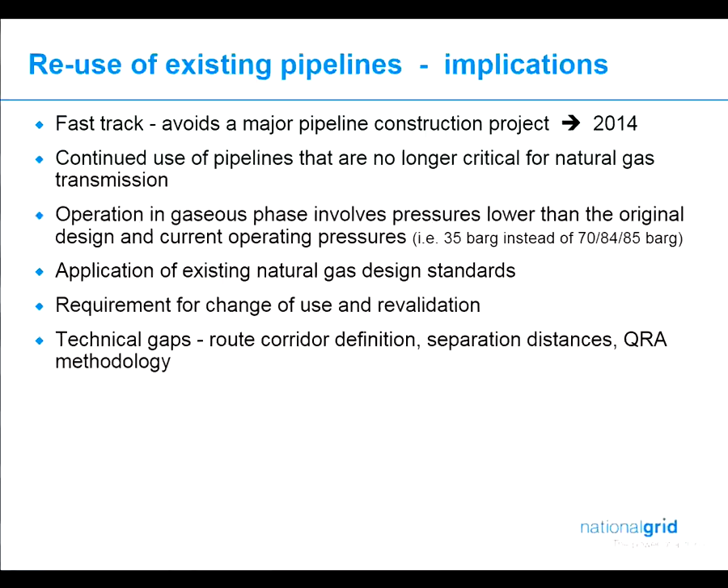So we now need to look at the requirements for change of use and revalidation. And that means identifying technical gaps. And the technical gaps that they identified at the time were the route corridor definition, separation distances, BPD versus minimum distance to occupied building, and the QRA methodology, because obviously the QRA methodologies which exist, which are very robust at the moment, tend to be for fluids which pose thermal hazards, not fluids which pose toxic or asphyxiation hazards. Okay, so essentially you need a new QRA methodology. Right, I'm not going to go through that in too much detail.

Sorry, do we have an available report for this? I sent some papers to Narracorn to put on Blackboard for you. I only sent them last night, so you probably haven't seen them yet. But he wrote to me last night and said they're now all available. So there is some stuff, and some of these papers are produced by National Grid. Some of them are also produced by Newcastle University, because Newcastle University was involved in the research at this stage.

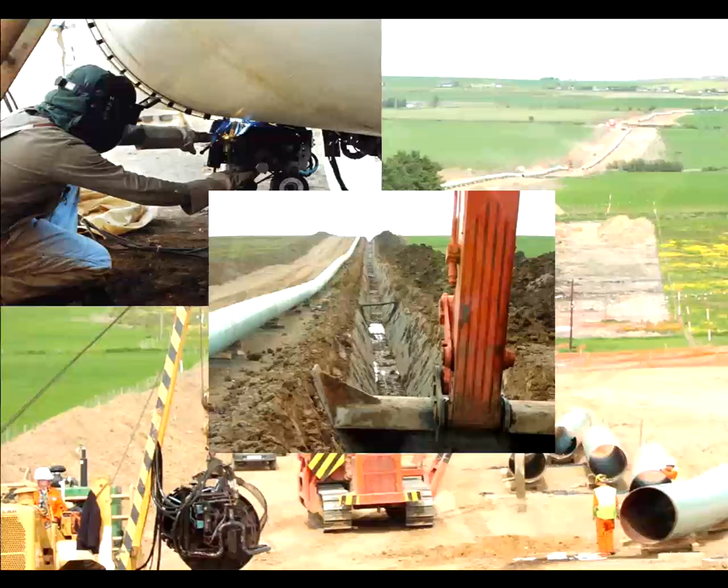Okay, some of this is just standard operator stuff. What this sequence is doing, they're basically saying the big issues with pipelines are all things we know about. The big issues are construction, getting the pipeline in. That's the expensive bit. We've done all that. We know all about the pipeline we've got, etc. The issue there is if it complies with TD1, can it comply with 8010?

Right, here they're going on to say existing pipeline codes do not fully address or define the requirements for CO2. Now remember, I've told you to use PD 8010 Part 1 2015, and that includes updates to allow it to apply to CO2. But at the time when National Grid was saying this, that hadn't happened, and the work that National Grid did as part of these research programs was fed into the pipeline standard.

So the issues they identified, and some of these things might be of interest: decompression, dispersion, phase boundary, specification, hydraulic analysis. Anything where you've got a phase change, hydraulic analysis becomes very important. The material requirements, if it's going to operate in the gaseous phase or the dense phase. It's going to be compressible, and therefore arrest of ductile fracture is important. Risk levels, what effects on people, and that affects the routing guidelines.

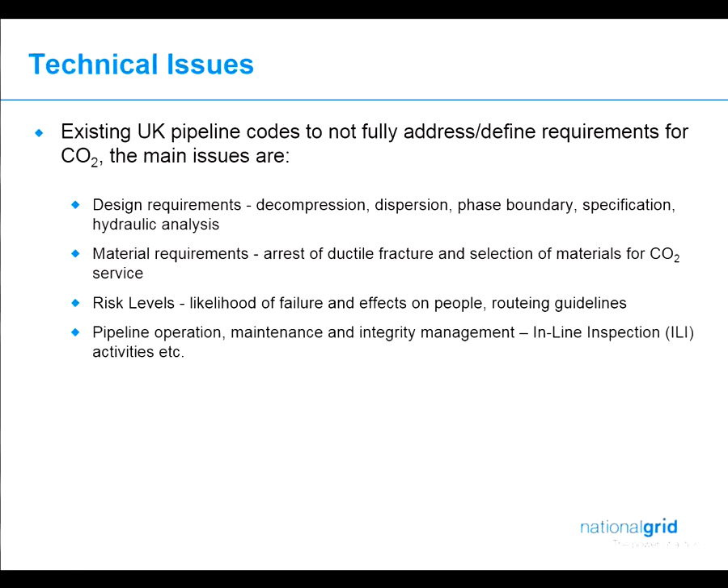Okay, right, so these were the items of work that National Grid was basically starting at the top. The need for the pipeline and public consultation, you don't need to worry about that too much. That's not part of your assessment, but it is something that concerns pipeline operators. I mean, obviously, the need for the pipeline is to do with, are you actually going to get the right amount of money for operating it?

So that's quite important. Public consultation: what you don't want is to have a major public reaction to what you're doing, because that'll just stop and delay and perhaps prevent you operating. Right, but now let's look at some important technical things. Design. These are most of the issues that I've asked you to look at. Design factor, area class, routing, hydraulic analysis. We'll just think about that in a minute.

If you do gaseous phase, you're not really going to have to worry about a hydraulic analysis because it's going to be a gas. However, if there's a possibility you could change phase, you're then straight into hydraulic analysis of liquids, and that is a much more onerous situation to be in. Block valve spacing, remote actuation, metering, corrosion prevention. They were all issues that, as an operator, were identified that needed to be considered.

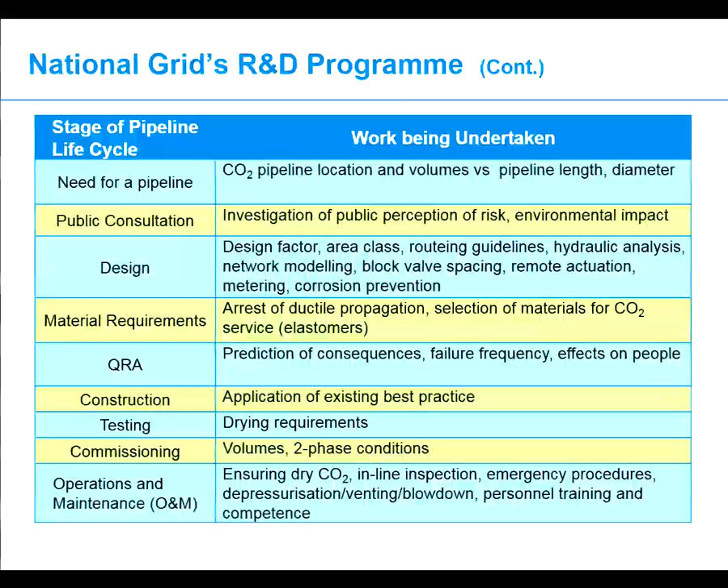You need to investigate and interrogate why they decided they couldn't go to dense phase. You need to do the calculations. That's simple design factor calculation. Okay, the critical point is 73.9 bar. So basically, in order to ensure you're in the dense phase, you're going to have to be greater than 73.9 bar. The pipeline at the moment is operating at 75 bar. They decided, right, we can't let it go over 35 bar.

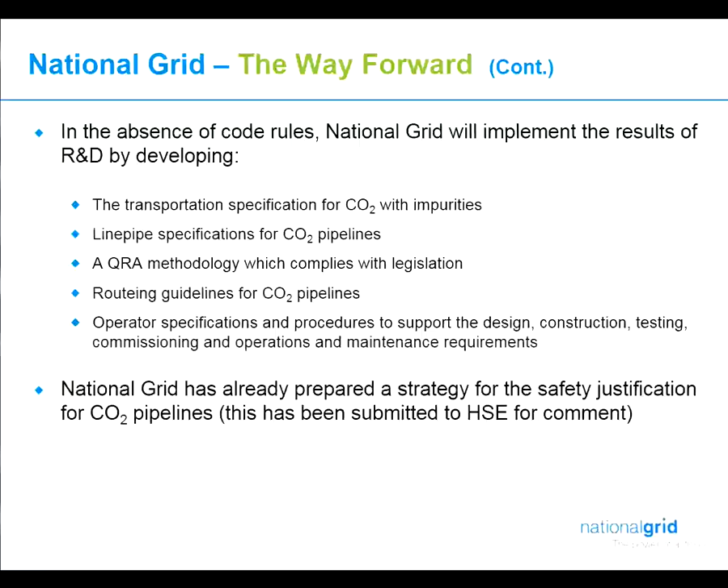Okay, then what they were saying was, well, in the absence of code rules, we're going to have to develop them. And those were the issues that they were looking at.

Right, I've got another presentation which I won't go through in full, but some of it is quite good.

Now this is the work. Right at the start of this project, National Grid put a contract with Newcastle University to do some investigations, basically a 5-task research program that they asked Newcastle University to carry out: first, determining the specification for CO2 purity, dryness, material requirements, implications for pipeline design in terms of existing codes, and hydraulic modelling.

Now there is one of the papers that I've asked Narracorn to put on Blackboard. It was published at IPC by the team doing the work at Newcastle University. You may find, if you look around, that they published more than that, but that was a good introductory paper.

And so basically here there are some conclusions. This is the conclusion they came to in terms of CO2 purity. The issue here is that most of the experience on CO2 pipelines comes from America, and that is predominantly associated with pure CO2.

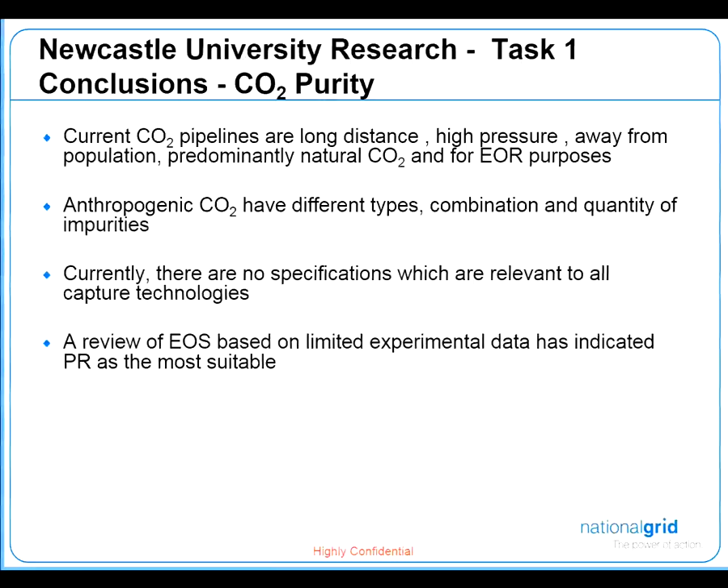In fact, these conclusions are actually good. I haven't put this on Blackboard, but I'll summarise this presentation and put some of these slides on Blackboard for you. It was work that Newcastle did, and I'm sure if you looked around you'd probably find research papers published on it.

Right, so here they're talking about the purity of CO2, and what's interesting is what they say about gaseous phase CO2 pipelines: water solubility is reduced, and therefore you need more stringent drying. In other words, if there's water in the CO2 stream and the CO2 is gaseous, the water is going to drop out and become free water in the pipeline, exposed to CO2.

So that's not something that you want to be dealing with. Right, material requirements — issues here are that upset and fault conditions might change the level of water that's in the CO2. So you could have specified a level of dryness, but an upset condition could mean water gets in. So what does that mean in terms of corrosion?

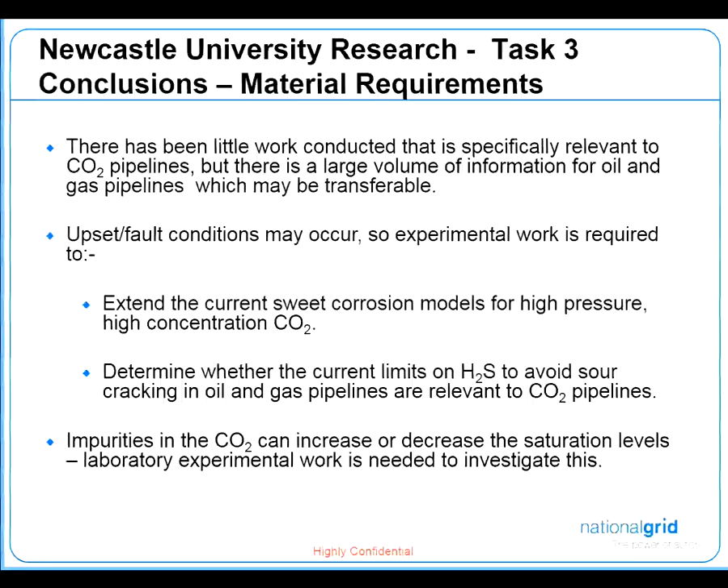Then they looked at fracture propagation. One of the papers I've put on Blackboard covers the initial thoughts on fracture propagation. They're also covering elastomer seal materials, and basically what they're saying is you've got to make sure your elastomers are tolerant to CO2, which is particularly important for valves.

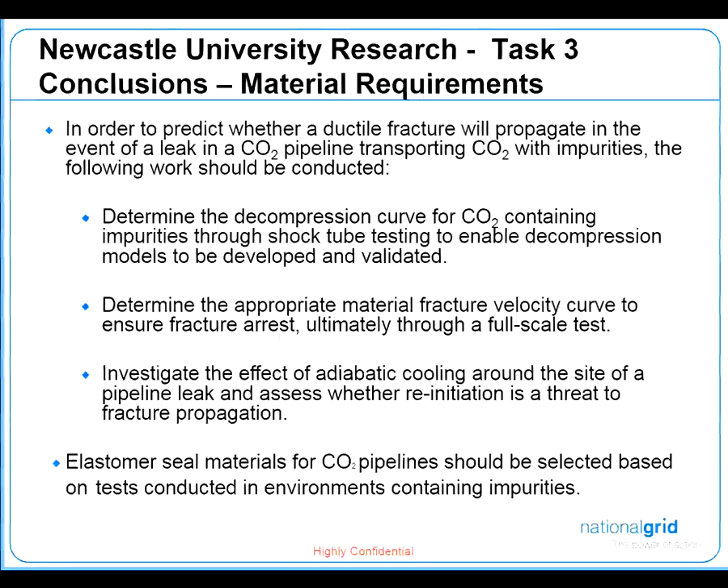Design to existing codes. Now, what Newcastle University said at the time was there's no provision in the UK for coverage of CO2 pipelines, and what they identified, since the codes don't cover them, are the issues you're going to have to think about. So, you know, a good list of points.

Newcastle University actually undertook the first hydraulic analyses of Feeder 10, which was the pipeline going from St Fergus to southern Scotland that National Grid had intended to use.

What they said was, first of all, they looked at flow rates for different compositions, looking at different impurities in the CO2 and saying that actually doesn't make a great deal of difference to the hydraulic analysis.

Low flow rates are gravity dominated, so density has a significant influence, which basically means the pressure profile between your high points and your low points could be a problem.

They actually calculated the maximum pressure difference for supercritical cases, which means they're talking about pressures above 73.9 bar. The pressure needs to be maintained above 73.82 bar for the best case scenario, meaning it's got to be in the dense phase, and kept above 86.69 bar for the worst case.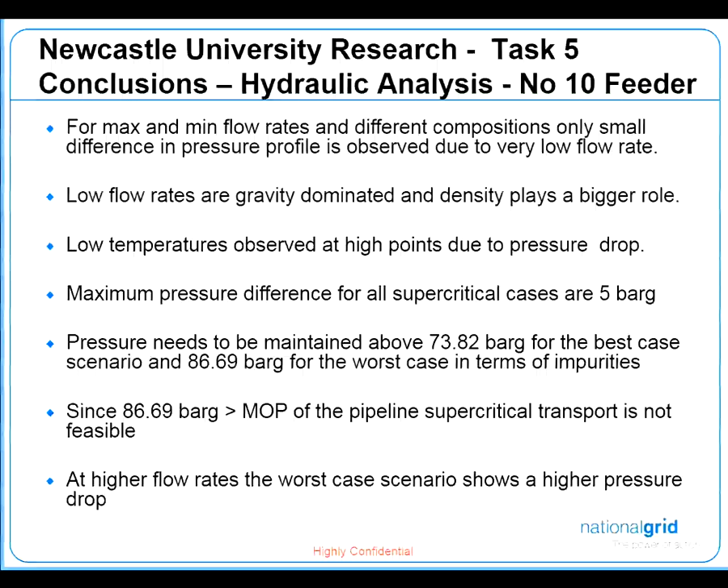And since 86.69 is greater than the MOP of the pipeline, supercritical transport is not feasible. So that really is where the original decision for National Grid not to go down that route actually came from.

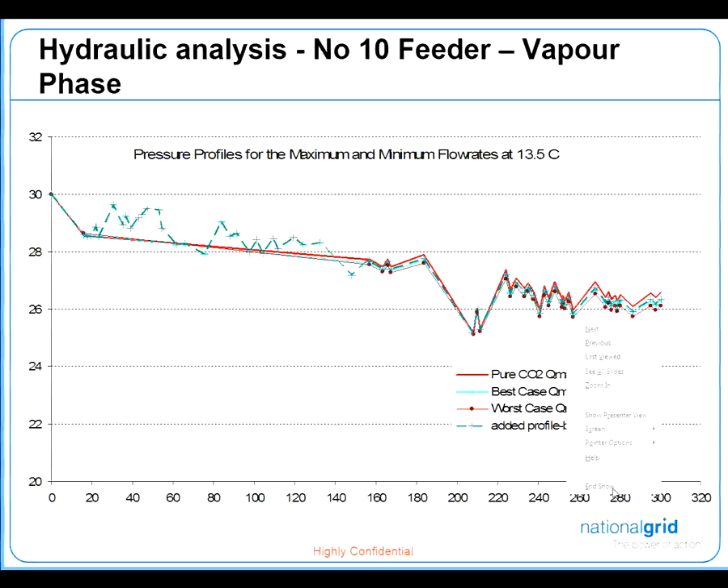Excuse me, just a question regarding the fatigue life. Is that a procedure specified in the standard, like how to calculate the loss of fatigue life? Because, for example, if I use, let's say, 20% of my cycles, and then I change the pressure, I change the stress, the number of cycles is going to change as well.